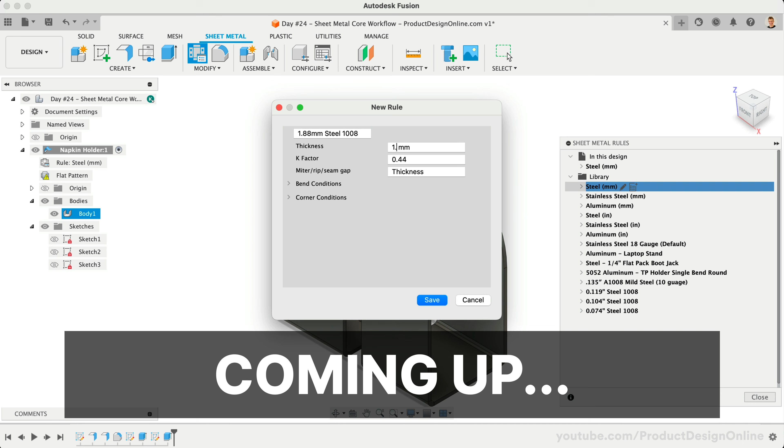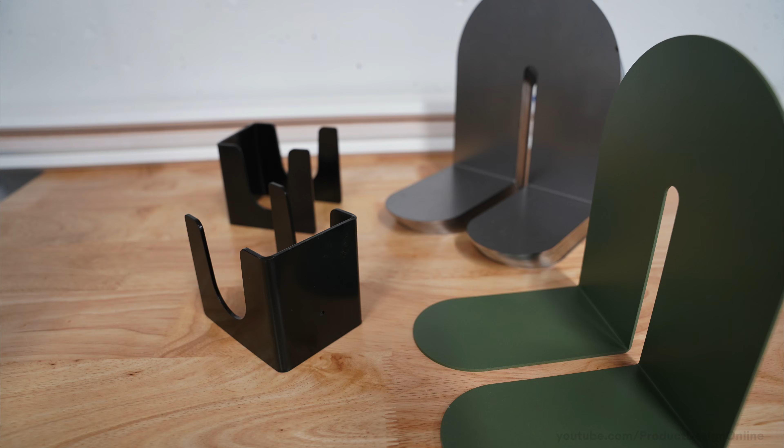Welcome to day number 24 of Learn Fusion 360 in 30 days. I'm Kevin Kennedy, and today we'll look at the core workflow and basics of sheet metal design in Autodesk Fusion. You can use this workflow to design common household goods, such as this paper towel holder, bookends, napkin holders, and more. It's important to note that Fusion sheet metal tools may also be used for cardboard packaging and other design scenarios where creating a flat pattern is desired.

We'll start with a new component from the toolbar. At this point in the course, we've only created standard components. When designing for sheet metal, you'll want to change the component type to a sheet metal component. After selecting sheet metal, you'll find we now have a sheet metal rule at the bottom of the dialog. Sheet metal rules describe sheet metal material characteristics and how the parts are manufactured. For example, rules will dictate material thickness, bend radius, and corner relief.

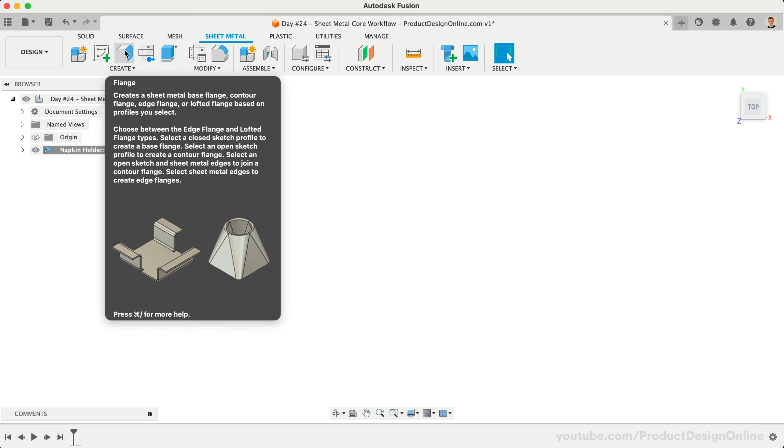We'll take a closer look at these rules later in this lesson. For now, we'll set this rule to the steel millimeters option. We'll name this component napkin holder before selecting OK. All of the sheet metal tools are organized in the sheet metal tab. Within the sheet metal tab, you'll find the flange tool, which is the most used of them all. It's common for sheet metal parts to start with a base flange as it represents starting with a stock piece of metal. Fusion sheet metal tools are parametric, just like the solid modeling tools.

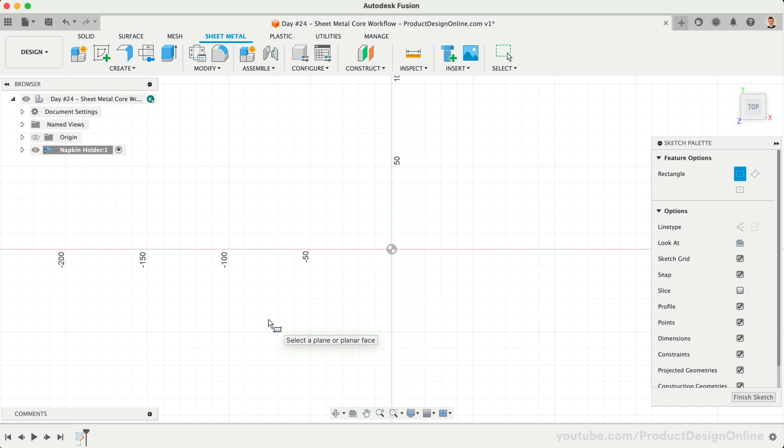Many of our sheet metal parts will start with a profile sketch for our base shape. Let's sketch a simple rectangle. Press the keyboard letter R for the rectangle and select the bottom origin plane to sketch on. This design will be symmetrical, so let's switch to the center rectangle before selecting the origin point. This will make it easier to constrain things and keep it symmetrical. We're going to sketch the base of the napkin holder, which has a length of 125 millimeters and a width of 60 millimeters.

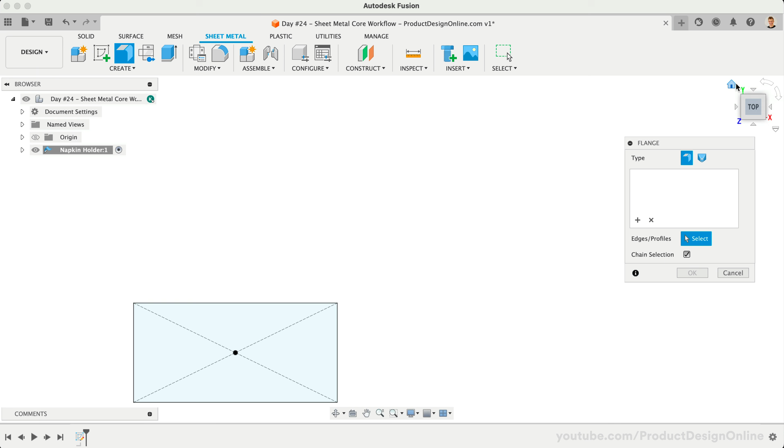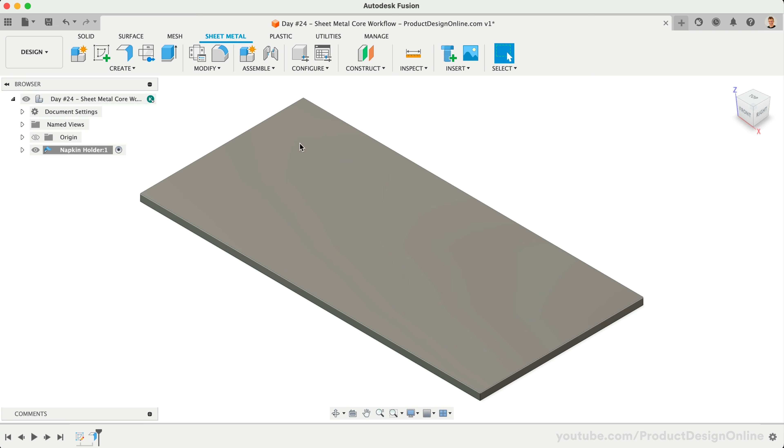After clicking to place the sketch, we'll switch back to the Sheet Metal tab and activate the Flange tool. The Flange tool helps us turn sketches into sheet metal faces. To create a flange, select the profile sketch and notice it automatically applies the sheet metal thickness based on the steel rule we selected when creating the component. We'll later discuss how we can change this rule. When necessary, you can also choose which side of the sketch the flange sits on. Let's select OK. At a glance, this result may look similar to a sketch with an extrude. However, you'll find that we have a sheet metal body in the browser instead of a solid body.

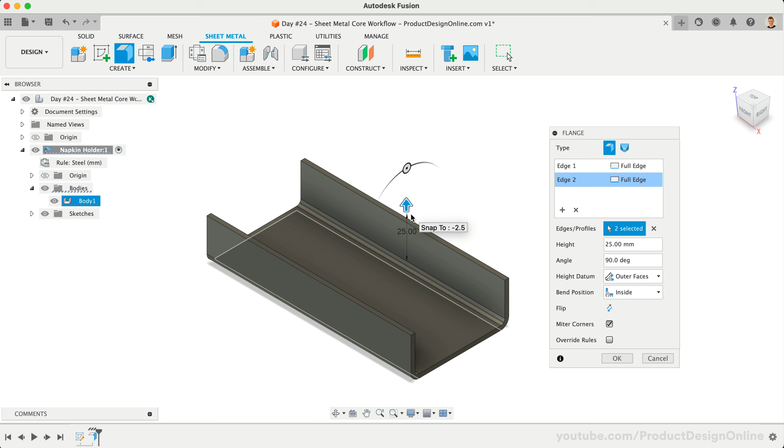Let's take a look at the advantages of sheet metal flanges. We now want to create the top two flanges of our napkin holder. We'll activate the flange tool again, this time selecting the top of the two long edges. We can then pull the blue directional arrow up to create these flanges. This is one of the great benefits of using the flange tool. We can quickly create edge flanges from existing base flanges. Let's set the height as 130 millimeters.

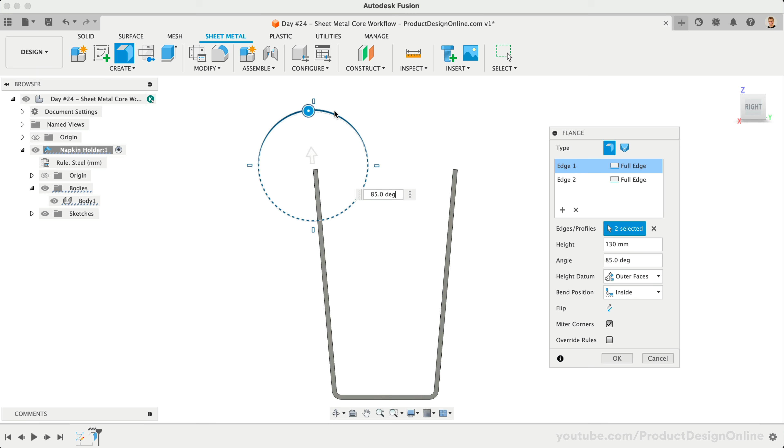Within each of our edge selections, you'll find that we can choose from different flange width types if we don't want our flange to run the entire length. We can also define the angle if we need an angle other than 90 degrees. Lastly, we can set our height datum and bend position. The height datum controls where our flange height is measured.

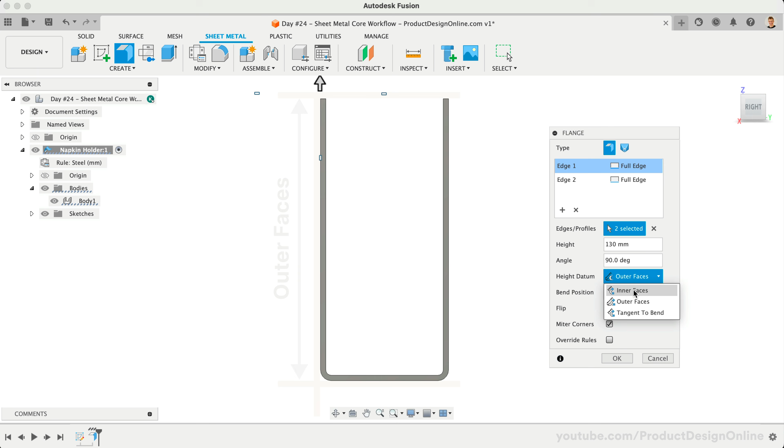For example, if our 130 millimeters height needs to be from the bottom of the product to the very top, then we would set this as outer faces. If we wanted our 130 millimeters to be from the inside face of the base flange, then we would set this to the inner faces. I've added notes on these options below this video.

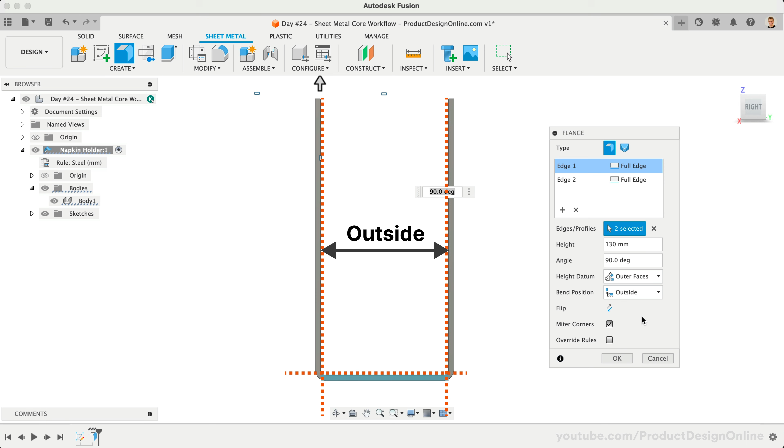Our bend position controls where the bend is positioned between our base flange and the new flange. In our scenario, this is the new flange on each side. If we want to retain our 60 millimeters dimension from the width of our base flange, we'll want to set the bend position to the outside option. Outside will make the inside face of our two side flanges align with the edge from our base flange, retaining that 60 millimeters dimension. To show you the difference, I'll set this to the inside option and measure the results.

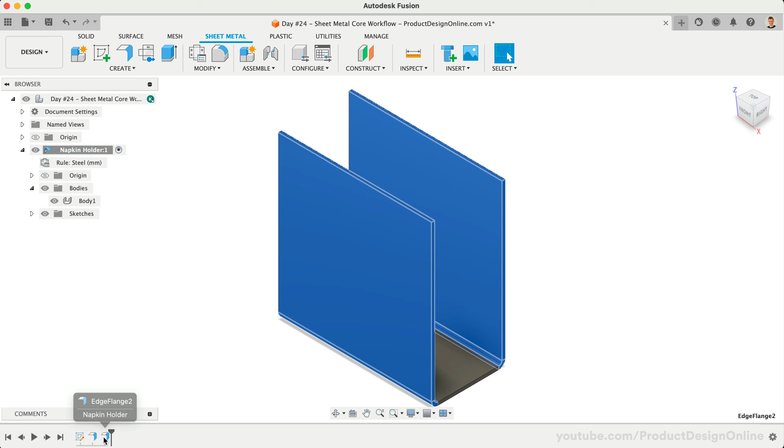Notice the value is 55 millimeters, 5 millimeters shorter than our base flange's dimension. I'll set this back to the outside option as I do want to retain the 60 millimeters value. These options may not feel important for something as simple as the napkin holder, but they're important to keep in mind for future projects. Height datum and bend position can have a significant impact on sheet metal parts that require precise measurements.

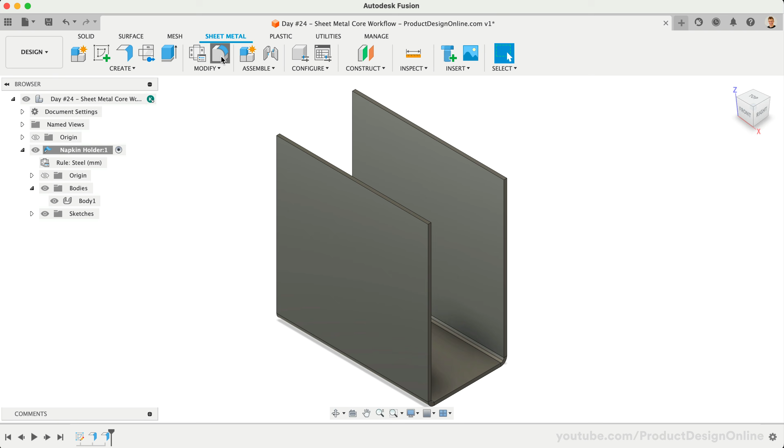We'll now add fillets to our top flanges to create the rounded portion of the design. Fusion sheet metal bodies can be modified with most of the standard solid modeling tools. This includes fillet and chamfer. I want this design to retain the arc at the top even if we change the overall width of the holder. We can achieve this by using the full round fillet type in the fillet dialog.

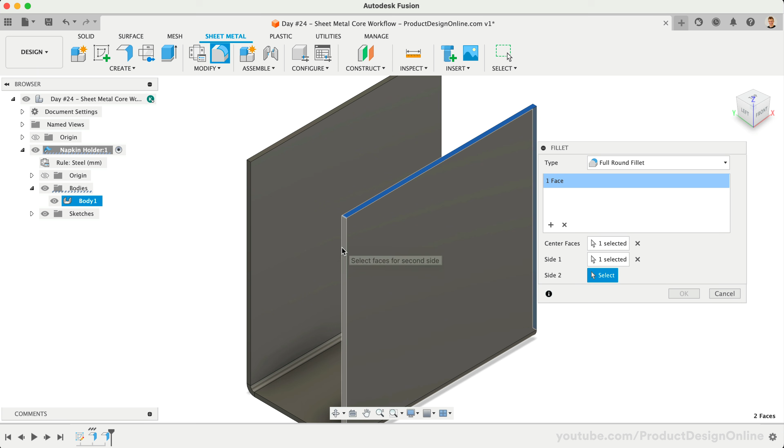Start by selecting the top center face. We then need to select both the left and right side faces for each of the side selectors. Note that you'll need to hold the Command key on Mac or the Control key on Windows. This results in a fillet that will remain tangent to both of our sides even if we change the width or height of our design. Let's repeat this for the other side flange by adding a new selection set, followed by repeating the same process.

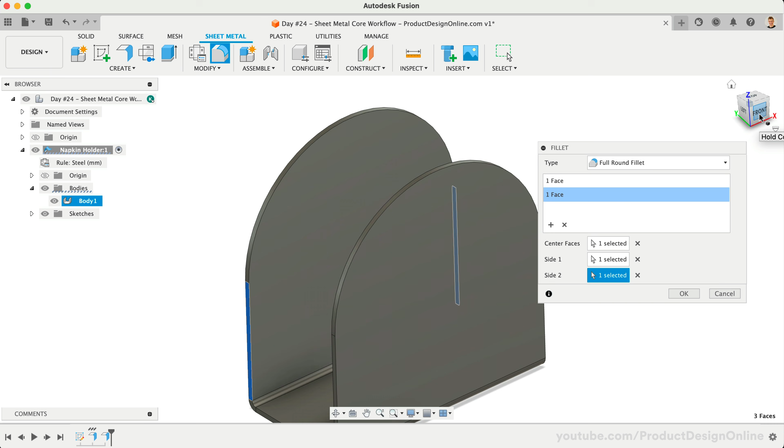The basic shape of our napkin holder design is now complete. Let's take a look at creating flat patterns before we finalize some design details. A flat pattern is the shape of the sheet metal part before it is formed. Flat patterns show bend lines and other details which can be turned into two-dimensional drawings or DXF files used for manufacturing. Activate Create Flat Pattern in the toolbar. We're then prompted to select the stationary face. The stationary face is typically the base flange that the rest of our flanges are created from.

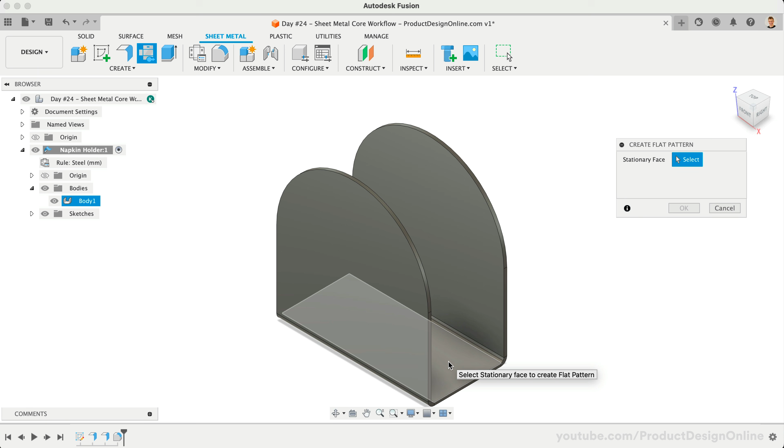Once complete, you'll find Fusion turns our three-dimensional sheet metal body into a two-dimensional flat pattern, including our bend lines, bend zones, and center lines. Note that we're also placed in a contextual flat pattern environment. This is important because when in the flat pattern environment, you can add features specific for manufacturing, such as tabs. Features added in the flat pattern environment will not be reflected in the folded model.

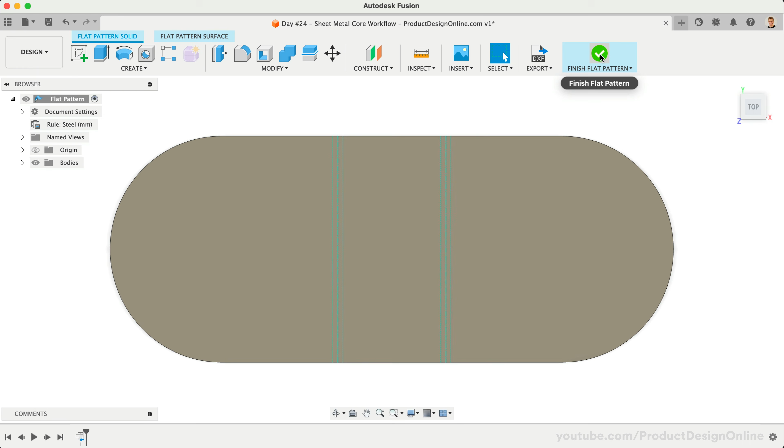When complete, we can select Finish Flat Pattern. Our model is folded back to its three-dimensional shape and a flat pattern node is created in the browser. You can switch between the folded state and the flat pattern state using the Activate Flat Pattern radio button.

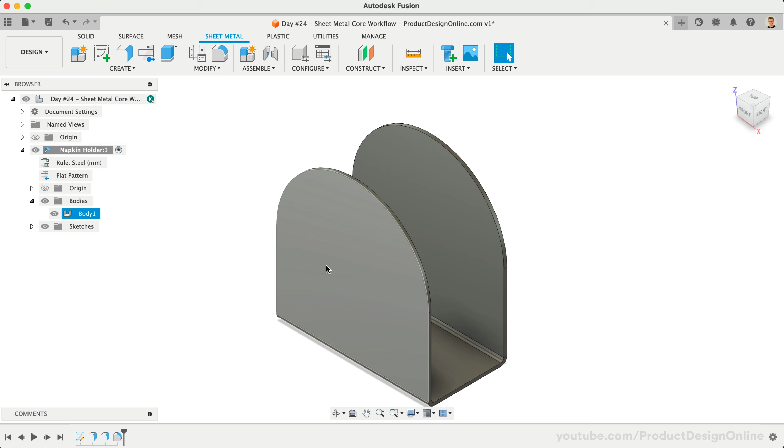Let's now finish off our design by creating a slot down the middle. Create a new sketch on the upper flange. We're going to create a slot that matches the outer shape, so we'll use the Offset Sketch tool. Before we select the edges, let's uncheck the Chain Selection option. This will allow us to select the left edge, top, and right edge without the bottom. I'm going to offset this minus 55 millimeters. This value can be anything based on how small or large you want the slot to be for the final design.

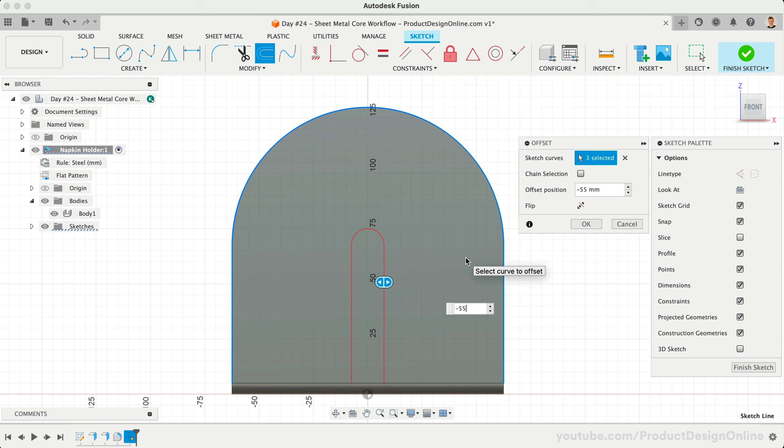We'll then use the Line tool to close the bottom of the sketch profile. Use a combination of straight lines and constraints to fully define the sketch. Notice the bottom line is not yet defined. I'll add a coincident constraint to the bottom line and our origin. This fully defines our sketch. We can now use the Extrude command to cut these two sketch profiles out of our existing sheet metal body.

Set the extent type as ToObject before selecting the opposite side. Remember, this will help our design remain parametric when the overall width or material thickness changes.

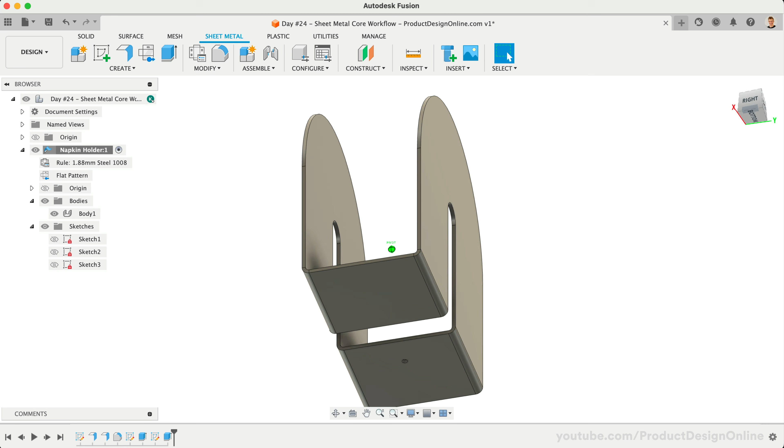You'll notice my final design has a small hole in the bottom flange. A small hole is often required if you plan to have the part powder coated, as they need this hole to hang the part throughout the coating process.

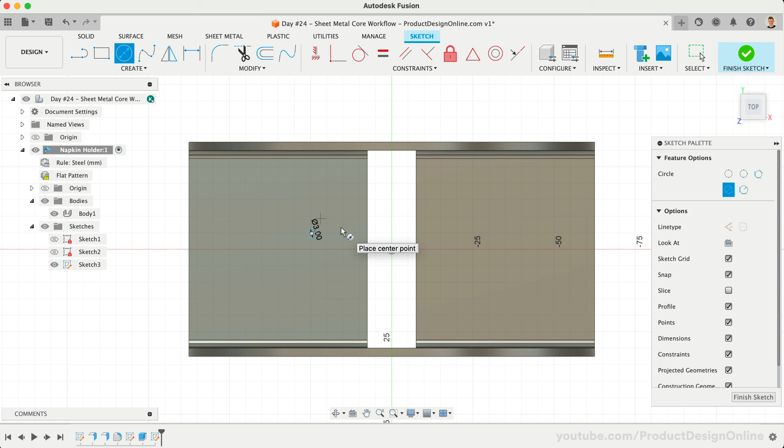Let's sketch a 3mm circle on the bottom flange. We can dimension it so it's 25 millimeters away from the center origin and apply a horizontal constraint to keep it centered to the origin. When you extrude cut the hole, don't forget to use the ToObject extent type again.

Let's now look at changing our sheet metal rule. This design was laser cut, bent, and powder coated by Fabworks in a 14-gauge steel, which is approximately 1.88 millimeters or 0.074 inches. In Fusion, we can open the Sheet Metal Rules feature to create a custom rule or select from existing rules.

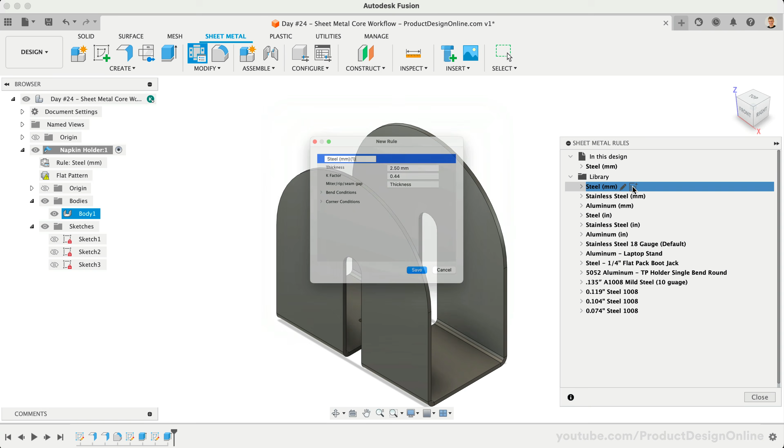Toggle the library open and select the new rule icon next to the steel millimeters option. This will create a new rule, starting with the characteristics of the existing rule. We can rename this specific to either our project or material thickness. For example, I'll name this 1.88 millimeter steel. I'll also add 1008, which is the type of steel.

Most importantly, we need to update our desired thickness, setting this to 1.88 millimeters. You will also find that each rule includes the K-factor and bend and corner conditions. Each of these items will vary based on the type of material, the type of bending, and other considerations.

We won't discuss the K-factor and these other details in this lesson, but note that this is important to consider and will affect your final design. I used a K-factor of 0.38 if you'd like to get your final design manufactured by Fabworks.

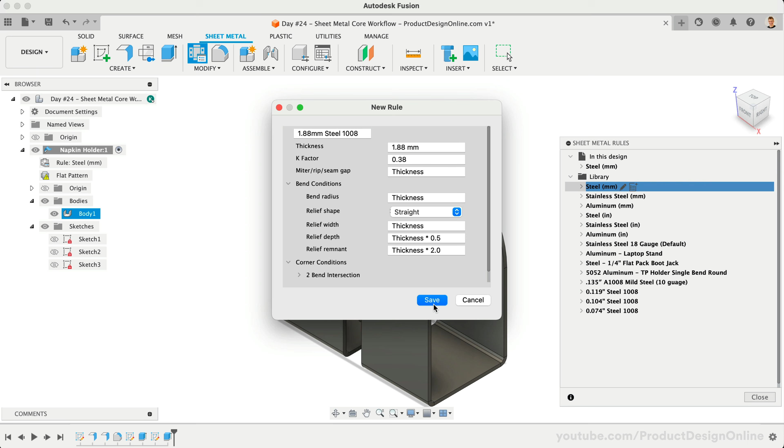Now that our rule is in the library, let's close the dialog and head to our sheet metal component in the browser. Each sheet metal component has a rule associated with it. Hover over the rule and select Switch Rule. Select the desired rule from the drop-down list.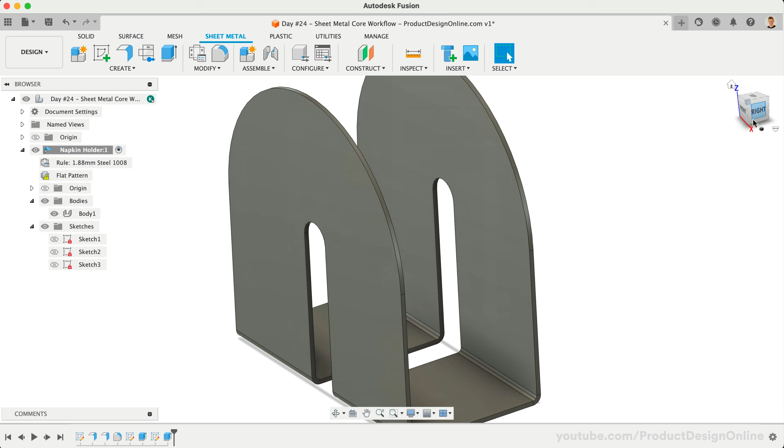Pay close attention to the thickness of the model as I select OK. You'll notice the thickness changes based on the new sheet metal rule. The K-factor and other bend conditions will also affect the bend radius of the design.

It's important to note that changing the sheet metal rule can be done at any time. However, depending on the design, you may want to set the desired rule early in the design process so you can account for different design elements accordingly, especially when dealing with corner elements.

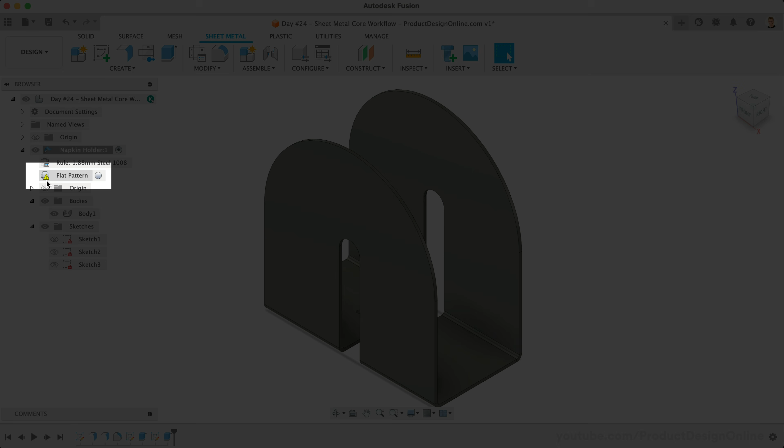Changing the sheet metal rule will also affect the flat pattern if the thickness changes. Notice we have a warning icon in the browser next to our flat pattern. We can simply activate the flat pattern, which will generate the latest flat pattern based on the existing design.

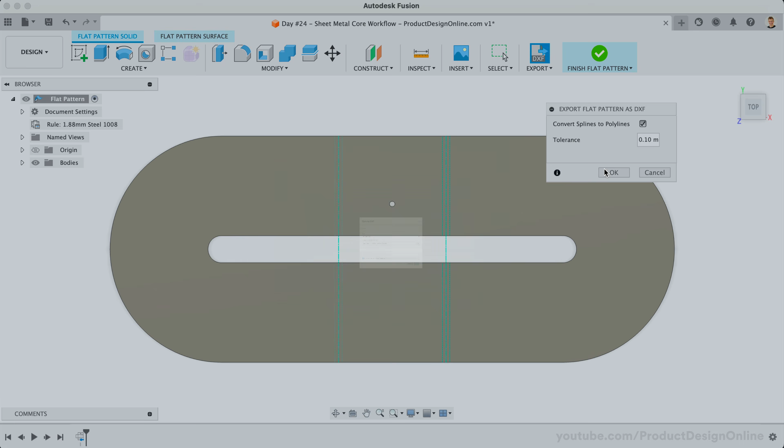Now that our part is ready to be manufactured, we can export our flat pattern as a DXF file to send to the laser cutter. However, the file type ultimately depends on the manufacturer's requirements. SendCutSend often requires a DXF file, while Fabworks now allows you to upload the design from a STEP file, meaning you no longer need to worry about the flat pattern.

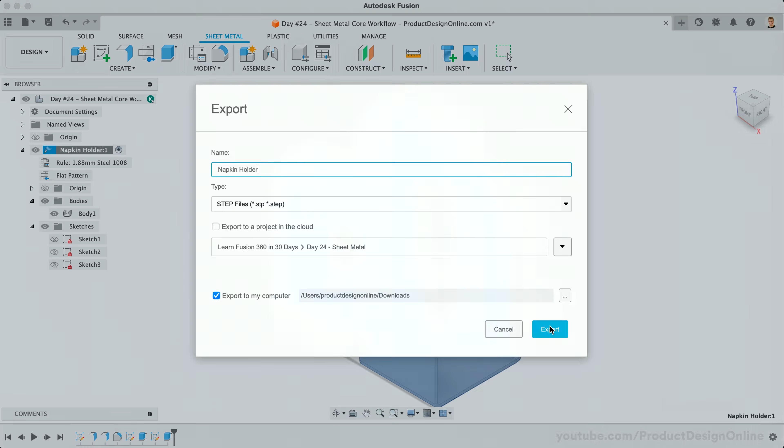In that case, we can right-click on the sheet metal component to select Export. Choose the STEP file and export it to your local computer. You can then upload the file, choose Materials and Optional Add-on Services, and order your parts. You've successfully completed a basic sheet metal design.